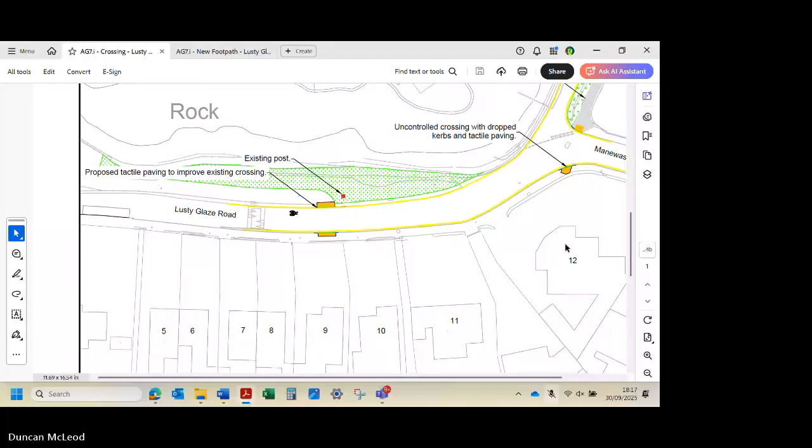Going along the cliff edge, people are following the path here and coming out here. It's only going to be, maybe if you're on a bike, or you've got pushchairs, wheelchair or wheeled, that you might then do this and cross over, and then cross back again here.

Yeah, it is within human nature. I mean, it doesn't need a psychologist, and I don't think any person has raised it. If I can just say something else before you go, there doesn't seem to be any signage indication that there's going to be crossing points anywhere.

Sorry, what do you mean? The warning for drivers that there's crossings, pedestrian crossings. I don't know, but it's not marked on here though, on a bend as well. I mean, I know it's a slow road, but it's a single line, bends, right? And it just seems like a really weird solution to something.

I just think the desired path point is really relevant here. Why spend money creating the better path on the right-hand side? Why don't they create a better path on the left-hand side? People are naturally wanting to be on that left-hand side to see the view. So bring the fence further forward and make the path to the right of that desired path.

Along the edge of the road, that's where people want to walk. Make the path on that side of the road. So you're saying extend this down to here. Yes, so you bring that border fence a little bit further forward, because of the erosion, but people are still walking on there and they will continue to do that. So why spend the money on the other side of the road?

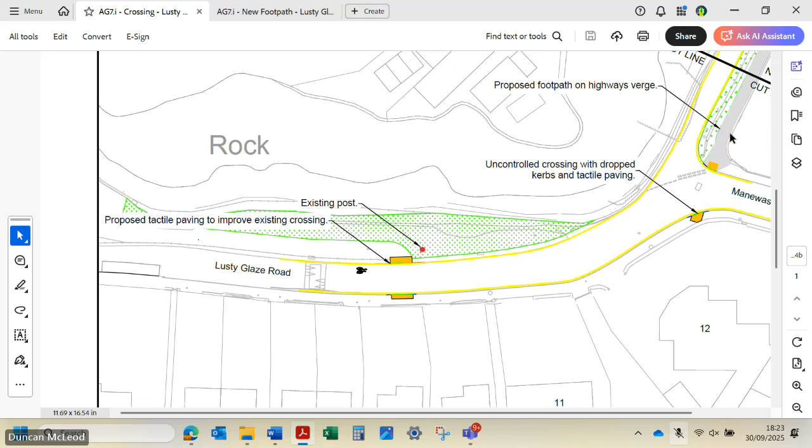That grey bit is actually a desire path, isn't it? Yeah, that they are able to take advantage of. That's a desire path, yeah. And that's going to be a fully fledged footpath.

On the other side, the hedging is such. Well, that's the fence there on the road. You haven't got room. What are we being asked to do, by the way? You're just consulting on it, so it's just commenting.

If we go to the letter, we have one of these forms we fill in for this type of thing, and it says whether you support or object. Can we tick both - support the top bit and object to... I think by the sounds of it, we do support it, subject to confirmation that they're going to...

So it's the list of buts, isn't it? Where's the signage, please, for road users? We've got some reassurance about signage for road users, permeable surface, and some reassurance that people aren't just going to be able to walk along the current desire path.

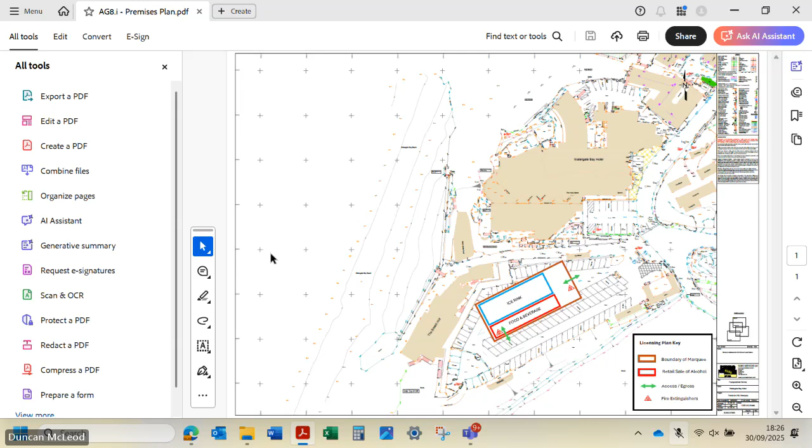It's rare to see time-limited licences. They used to be a thing a while ago, but you don't see them that often these days. It's almost like a temporary event - if it wasn't going on for as long as it is, it probably could have been covered by a TEN. But anyway, the premises is described as Christmas ice skating within a marquee that will be situated within the car park at Watergate Bay Hotel.

So in this car park here. The application for the premises licence is for a fixed duration between November this year and January next year - presumably the start of November and end of January, for a temporary Christmas ice rink.

It will be open to the public from 9 in the morning till 10 at night. The retail supply of alcohol, for consumption on the premises only, is 11 o'clock in the morning till 9:30 at night. What could possibly go wrong with that? But ice and alcohol, I mean... I'm glad somebody said it, because I think most of us were thinking it.

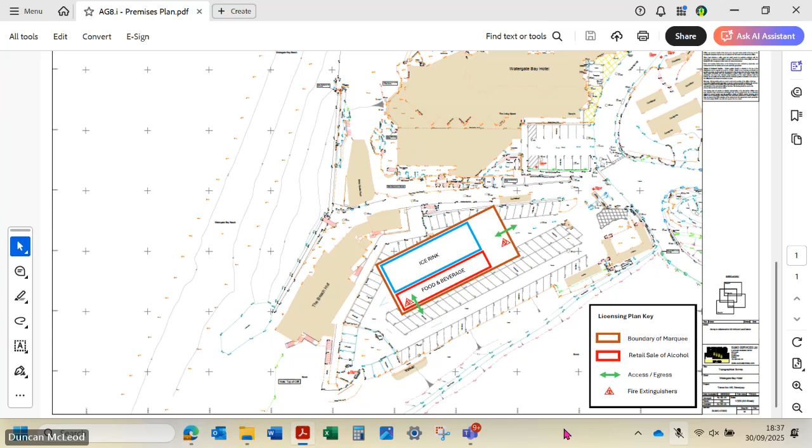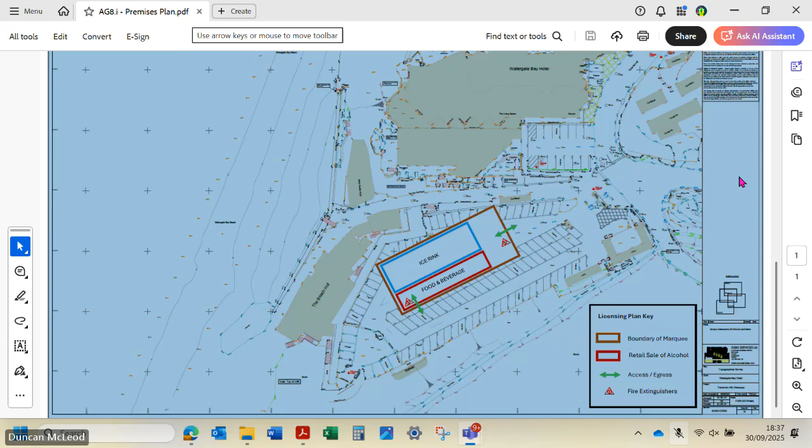Outside paving again, outside seating on the paving again. Looking at the photos though, it suggests they're already out there - we've got that street view as such. So this is the Clover Club, 19 Bank Street. The application is for furniture, as detailed in the application, on the highway to be used for the consumption. This is another one that follows licensing, having walked around the town. We've got some images.

So this is an existing layout that I suspect a licensing compliance officer has wandered past and said, have you got a pavement license? They said no, and were encouraged to apply for one. So that's their set out - I think it's been pretty much like that since day one.

They have provided us with this lovely layout. Basically you can see that they sit 2.5 metres out from the building line of the premises, if you like. No, it's 4 metres out, Duncan.

It isn't, because 4 metres is the measurement from this door to there. Oh, I see - okay, sorry, so it extends past the blockwork. It extends 2.5 metres. This bit is the bit that's undercover, and this is the bit that actually sticks out that they need the licence for.

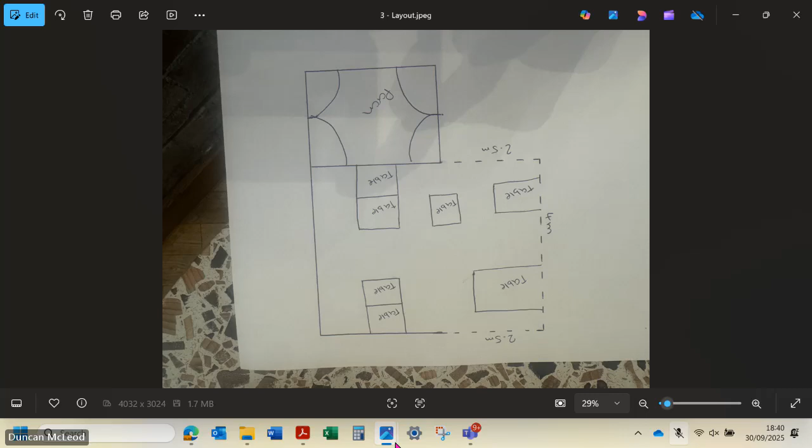So I'd suggest it's quite straightforward, unless anybody has heard any complaints about this particular layout. I mean, it's a pedestrianised area, but we do have large delivery vehicles - I wouldn't want it to come anywhere beyond that, because they still need to get lorries past there. I didn't know if something could be there for the visually impaired, because it's sticking out notably much further than previous applications we've seen.

I was just going to say that I think it's quite nice, and I'm happy to propose something.

I don't know whether people want more discussion before we get to a proposal. I think it's been in place for a couple of years. I'm not aware of the town council having received any complaints about it. Highways have certainly had plenty of time to look at it and haven't raised any issues. I go into Superdrug reasonably often and haven't stumbled over it.

Oh, I missed it. So we've got some licensing updates. There is finally the third attempt at a grant hearing for Sahara City, which Sarah and I are going to attend tomorrow morning. Hopefully it's not going to take forever - it really shouldn't do.

The Cornwall Council street trading policy that we were consulted on changes to has now been through the relevant Cornwall Council committee, and they've agreed it. The new street trading policy is now on Cornwall Council's website, along with the various changes I drew to your attention, including DBS checks, policy clarifications, a stronger move away from single-use plastics, and adoption of various public health low carbon initiatives.

There were a couple of unexpected changes too. One is a street trading register, which will be really helpful for me because I try to keep track of these things. If somebody suddenly stops trading, nobody tells me, so I have to check with the officer every now and again to understand who is street trading where in Newquay. Now they're actually going to have a register, which is really good.

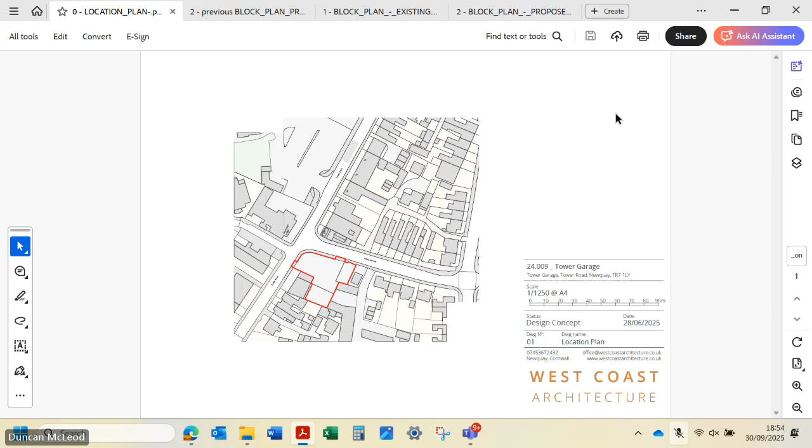Just as a quick recap, the refusal was that the previous design was considered to result in an unacceptable level of overbearing, overshadowing and overlooking to number 66 Tower Road.

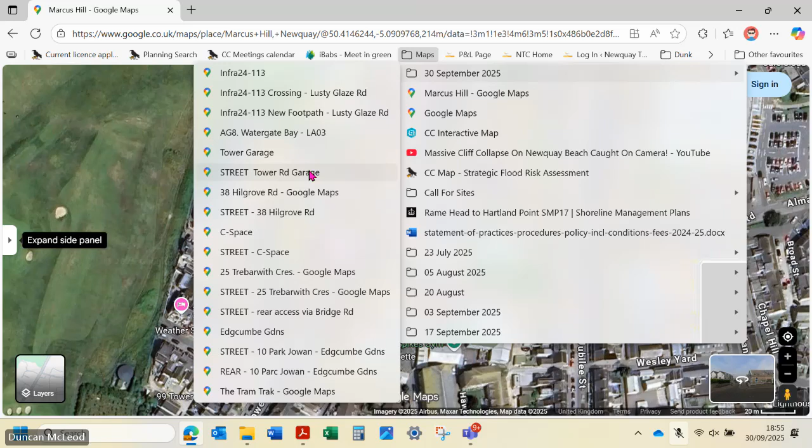If I go onto the street view, so number 66 Tower Road is this property here, okay? It's the first floor, effectively - we've got businesses on the ground floor, and it's this first floor. So it was thought that height, massing, proximity, window placement, etc., were all going to harm the residential amenity of number 66. That was the only material planning consideration it was refused on.

The other one was a lack of a planning obligation in terms of a completed Section 106 agreement, because they crossed that threshold of 10 dwelling units, and they do again with this, but I believe that is now resolved, and that's a matter for Cornwall Council anyway.

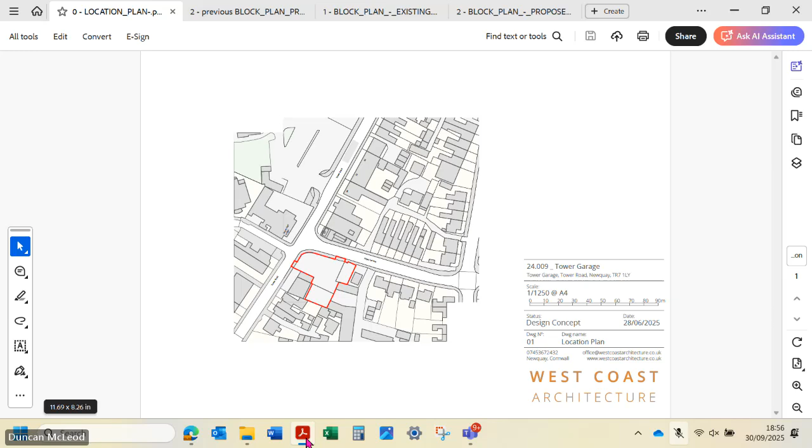Just to familiarise ourselves with the application site - so you see number 66 just sitting there, but the red line application site, the existing block plan, it's characterised by a large open space, and then these two commercial garage workshop buildings. It's worth noting that I believe the garage is currently still in operation.

Yeah, it is still working. It's not a vacant site. I thought Tower Garage is actually closed, so it's somebody else using it. The application documents say that it's still operating, and when I went past it the other day, it looked active - there were cars there.

Well, historically, of course, it's the old Hope fish cellars, as I discovered in my travels. Nothing left of it, apart from the name.

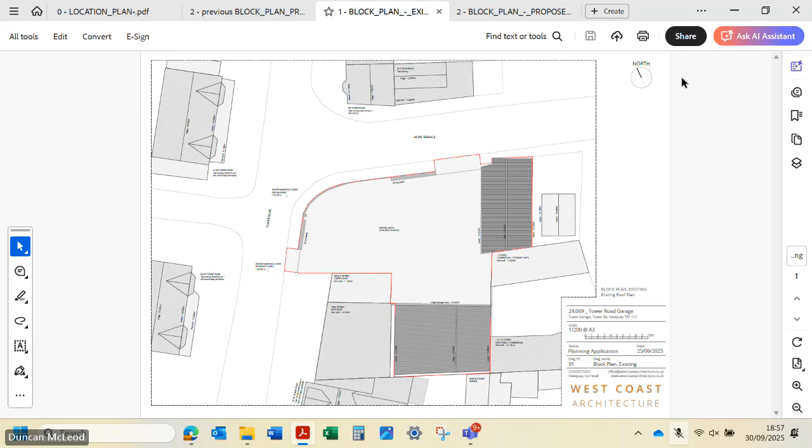So we've got a previous block plan. There are two proposed buildings to this - you've got this main building, although there are two elements to this main building at the top here, and then you've got the coach house down the bottom here. The coach house was definitely seen as impinging upon number 66. Interestingly, though, a lot of the changes have actually happened on the main building. So that was the block plan that we looked at last time.

Now, what you've got here - it isn't that they've suddenly put in a play park and a green field, it's a green roof. So this was effectively a 3-storey development. The new plan that has come back keeps this grey element of the main building as 3 storeys, and this green one has been reduced by 2, so it's now a single-storey building with a green roof. The coach house, there are some little changes to it, but we'll have a look at those in a moment.

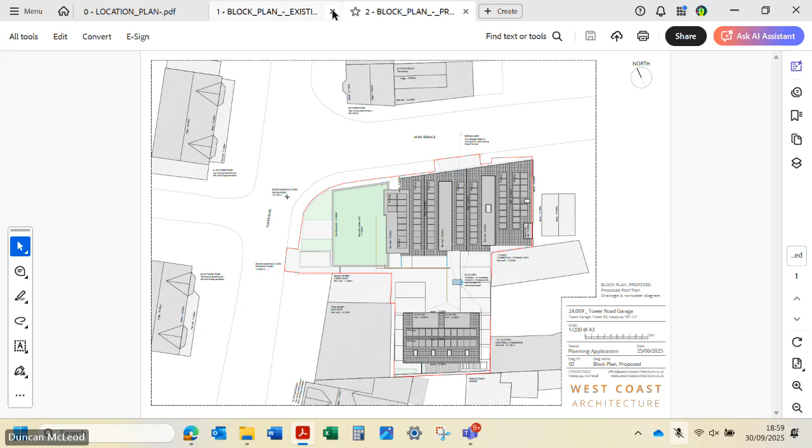So I wanted to have a look at the floor plans - normally the insides of these things aren't that important, but in this case they are. I'm going to get rid of these because unfortunately I'm going to end up opening so many PDFs, it's going to be - I'm just not going to be able to find my way around. So...

This was the previous main building that runs along Hope Terrace, spread over 3 stories. It did have 3 commercial units. So this was, when we looked at it last time, a mixed-use development with 3 commercial units at ground floor level, and the vehicular access is from Hope Terrace, between the building in the middle and the one on the right.

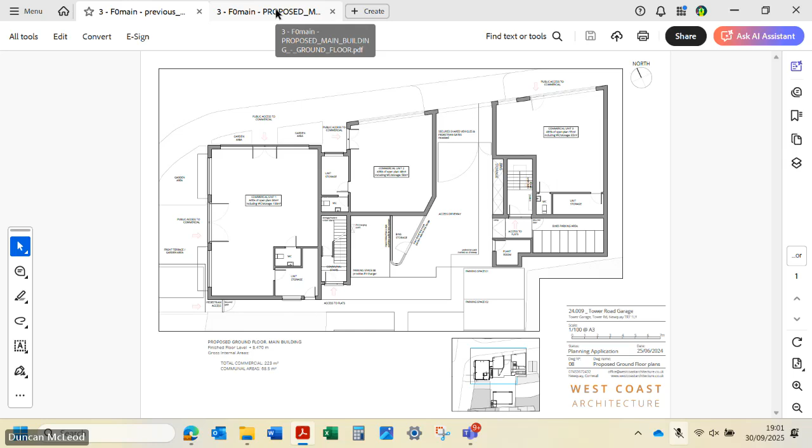So this is a significant change: the site is no longer proposed as mixed-use development. It is all residential. They have got 4 one-bedroom apartments in that space where the retail units would have been. 3 of these are designated as holiday use only.

One important and positive change is that a lift has been added. On the ground floor, there are 4 flats, 3 of which are holiday use only.

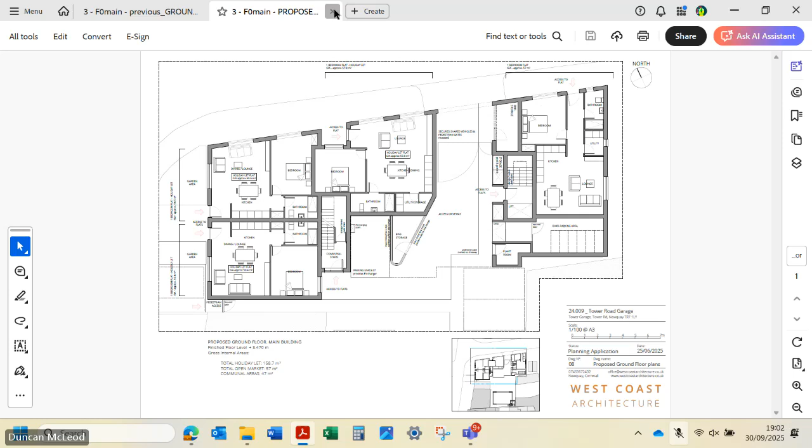So the right-hand one is still 3 stories, is it? They will all be - if you wait a moment, you'll get a better idea when I open these ones. When we look at the first floor, it becomes more apparent. Actually, no, we don't need that one. So this was the previous first floor plan.

They refer to it in the documentation as the Hope Terrace building and the Tower Road building. This is the Tower Road building because it faces Tower Road, and this one is the Hope Terrace building. They are all one construction, but referred to in 2 parts. Originally, the Tower Road building would have had first floor and second floor accommodation. In the new proposal it becomes a flat green roof because that part of the building has become a single story.

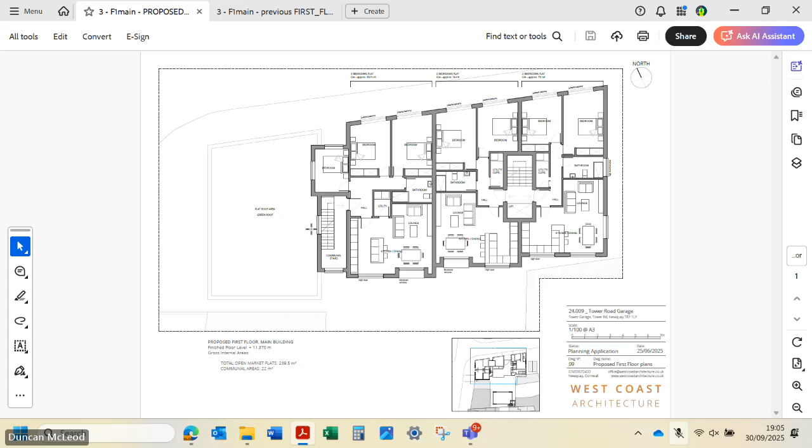We are told that reducing the Tower Road building to a single story is intended in part to address concerns of overbearing, overshadowing and overlooking of number 66. But it's interesting to note that in the officer's refusal, a lot of his concern seemed to be to do with the coach house - though I don't think it was solely that, but the coach house is obviously the closer part of the development. We'll look at the coach house now.

I'll finish this off with the street elevations, but I do apologise that this is such a fiddly thing to look at.

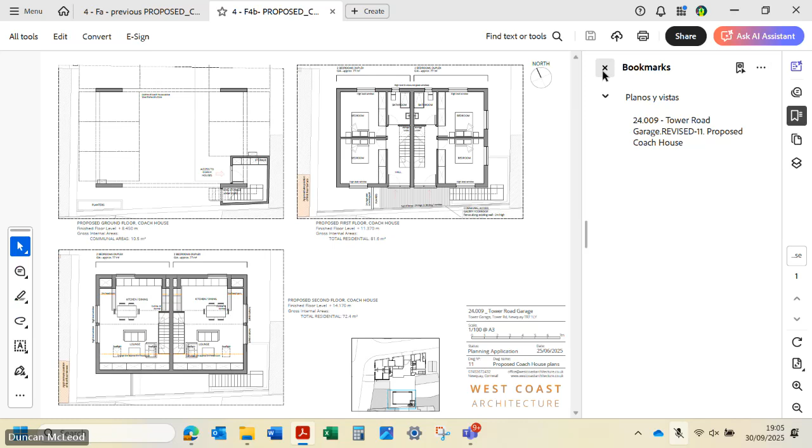So the coach house runs along the south of the site, as we saw. It's a similar footprint to the workshop that's there at the moment, and this building is also spread over 3 stories. There is a ground floor - that's the top left image. There's a lobby entrance to the residential units, which was in the bottom left-hand corner. It has now been moved to the bottom right-hand corner, away from the street and away from number 66.

It now occupies space that was given over to a secure surfboard store and shower. That has now gone, and the lobby into the coach house now sits in that space. There were 5 parking spaces in the previous design, and there are still 5 parking spaces here.

Floors 1 and 2 are occupied by a pair of 2-bedroom duplex apartments - 2 apartments, both spread over 2 floors. In total, there are 12 self-contained units on this development: 9 are open market residential flats, 3 are holiday lets. It's not a mixed-use site anymore, it's purely residential. The site provides, by my reckoning, 13 on-site parking spaces.

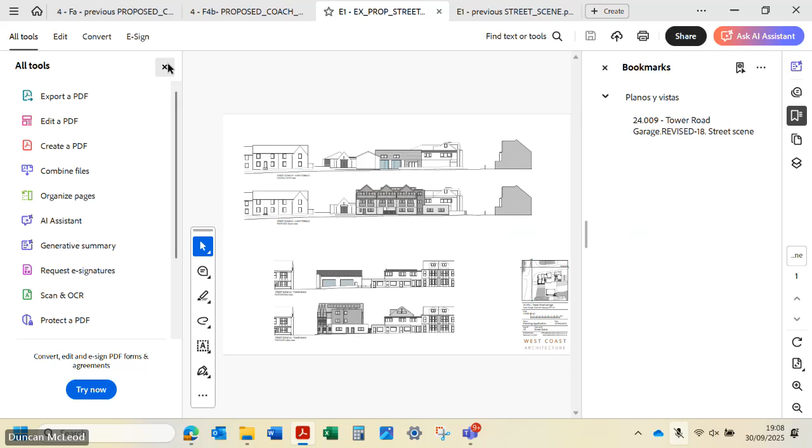That's the access to the coach house. So I imagine it's like that on the other one. Yeah.

Did you want to see that in more detail? No, I'll let you continue, Duncan. Okay, looking at the elevations. Right, so the previous street scene, let's see if we can...

Yeah, so this is the side-facing Hope Terrace. At the top you've got what's there at the moment, and the bottom drawing was the original proposal - retail units, commercial units on the bottom, and then 2 stories of residential above.

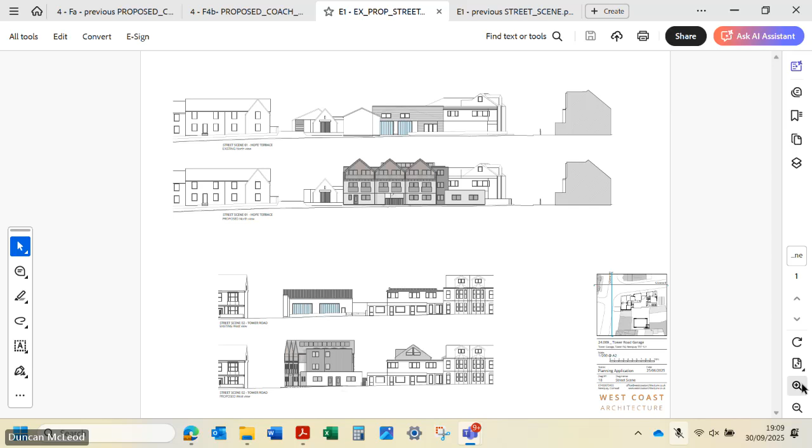Again, that was what was there before, and this is the reduced scheme. So the key differences being you've not got commercial units on the bottom, and the Tower Road building, as we're calling it, is now 1 story instead of 3. I'll flick between the two.

Okay, right, sorry, could I just also question or add - so the top bit, what's currently there, is actually quite set back from the road, isn't it? It's not on the pavement, whereas I'm assuming...

Yeah, so what we're talking about is where those cars are, right smack bang on the pavement. The beauty of elevations is they flatten everything out and you don't get that understanding. You're quite right to point that out - it's a bit misleading, I would say, those images that you just shared.

But you can see the windows. You're right to point that out - weren't clear, were they? If you go back to the one before, the display before.

So it's the street scene. Those are the windows of number 66 behind, aren't they? Yeah, yes, that's right. So that's why they are there - that was the previous one where they had the building in front of those windows.

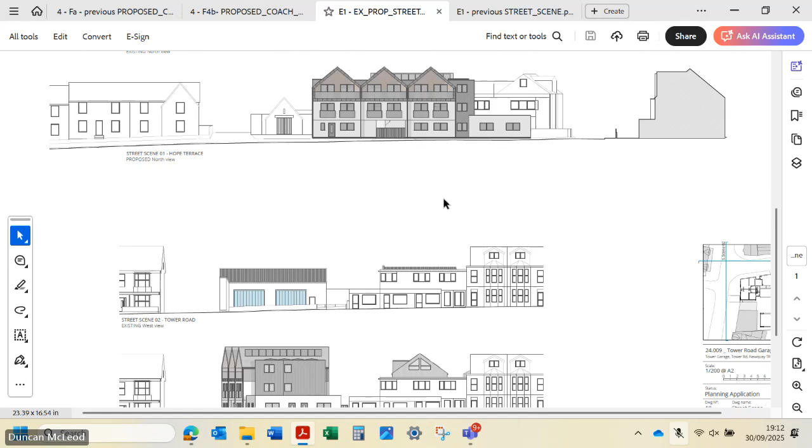It would have been quite nice if they, like other properties along the road, just have a little bit off the pavement, but I get that, and then they drive through in the middle of the building, so to speak, through an arch effectively, to the parking behind.

But it's that behind his flat as to what's going on there with the coach house - I think that is where our concerns are. I mean, because the design of them is in keeping with other housing on the street, with the apex frontage, you know, the gable ends.

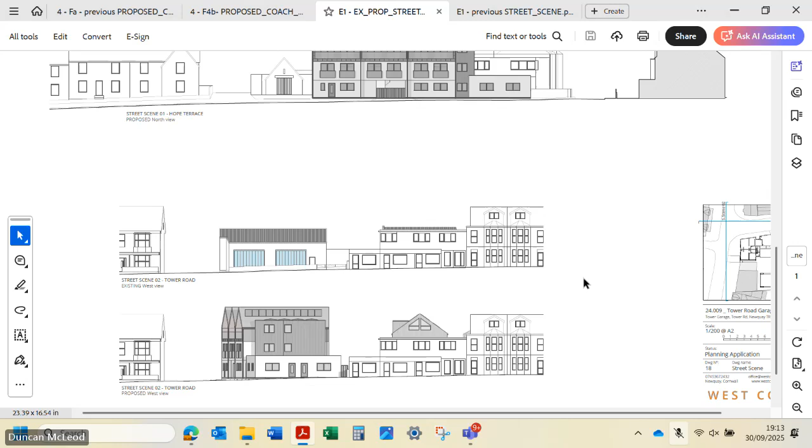Does anybody have any issues with that? It is going to be slightly taller than the housing opposite, but not by much. It's just that people are effectively living in the roof space with that third story.

Could I open the planning statement? What did the officer say before about the coach house? Because there's not a lot of change on that. It kind of depends how you interpret it.

The design, I think they must be talking about the overall design, not the coach house, not the main building, but the overall design results in an unacceptable level of overbearing, overshadowing and overlooking of number 66, primarily due to height, massing, proximity, window placement. And then it says the inset balcony and access walkway of the coach house. That element, I believe, has now been addressed.

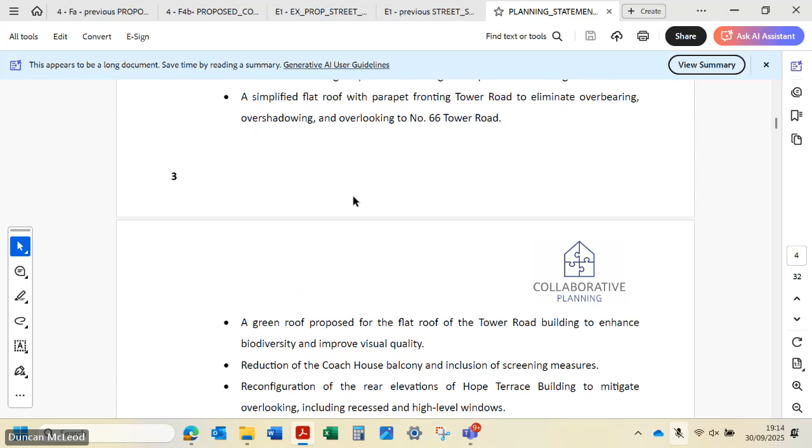So the applicants say the entrance and the walkway has been moved to the other side, but it doesn't seem to have addressed everything - they've probably changed the windows too. If we look at where the window is, no it doesn't actually. No, the windows are still there. So they've only addressed part of it, haven't they? But not the distance it's away, and it's still going to be overbearing, isn't it?

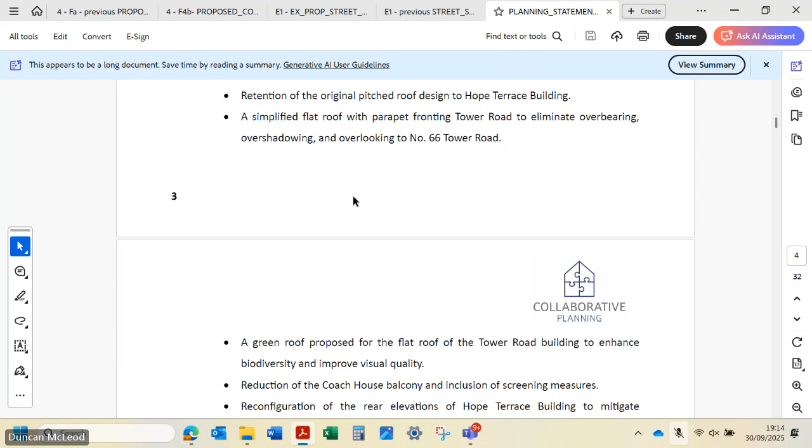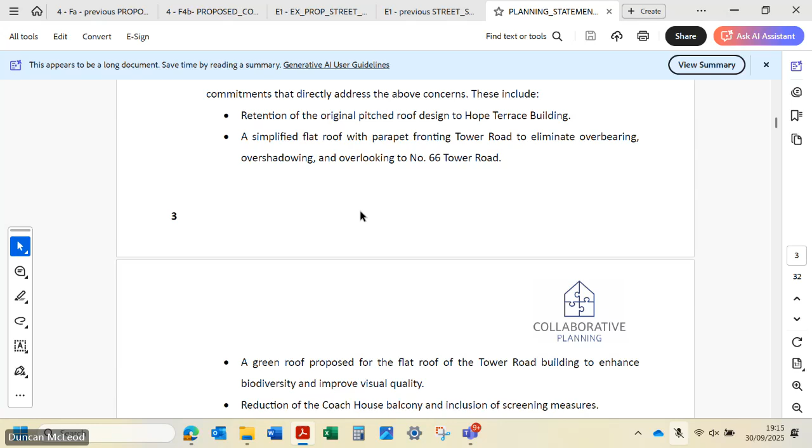So what we've got here in the planning statement is it says the revised scheme includes a number of design amendments and planning commitments. These include retention of the original pitched roof design to the Hope building. Was that okay? That doesn't sound like a change, that sounds like something staying the same. A simplified flat roof with parapet.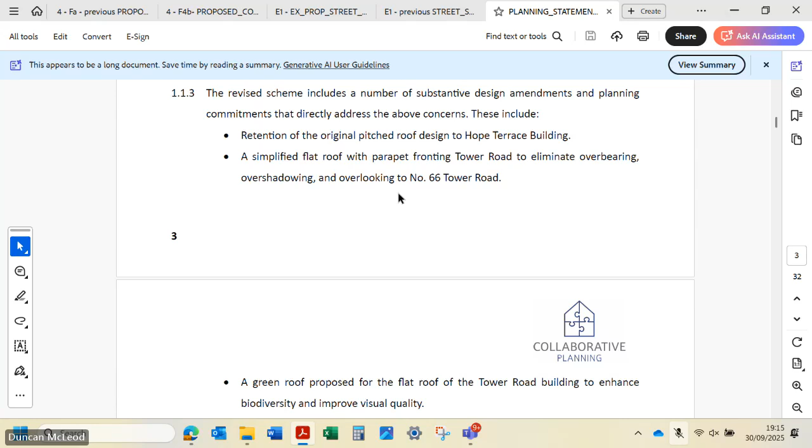So we've seen that - that's the first story element of the Tower Road building. A green roof to enhance biodiversity and improve visual quality. Reduction of the coach house balcony and inclusion of screening measures. So that suggests to me that the balcony has been redesigned so that it's not causing an overlooking issue.

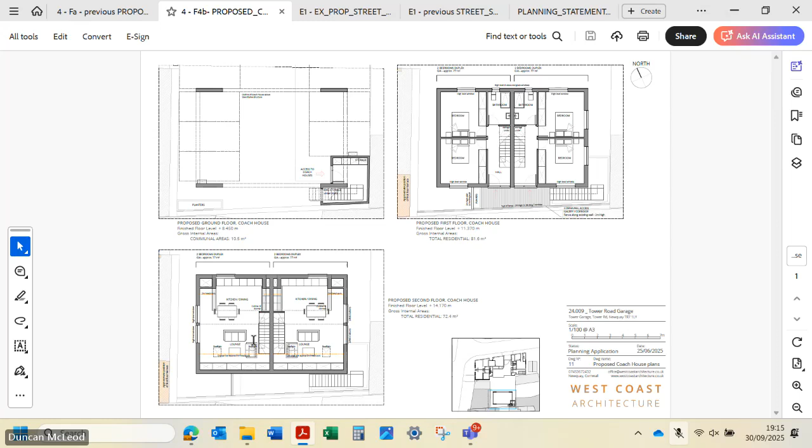But perhaps we need to have a close look at the elevations and the floor plan, perhaps, to start with. I'm just trying to figure out where this is.

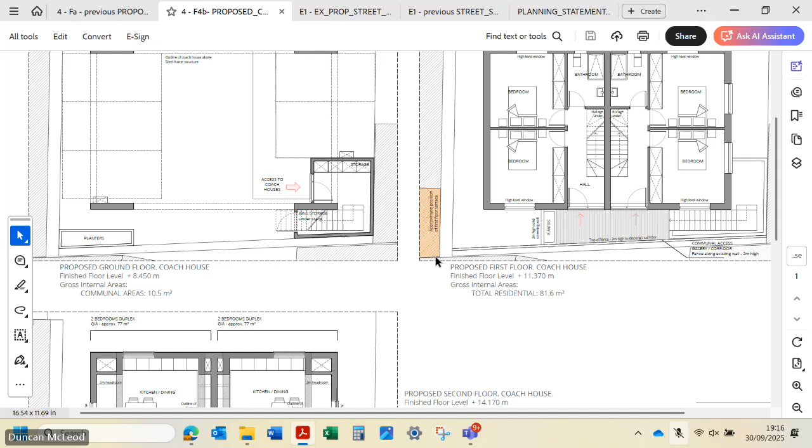But effectively, we don't know what his window is at the back, do we? Because effectively he's going to have a brick wall, which looks like a couple of meters in his face, in the photograph he sent. He's only done one - I don't understand what most of the photographs are supposed to indicate, but he does have two photographs where he shows the building coming in front of part of his window.

Hang on, let's have a look at those photos. I've got some photographs from the last time I looked at this - there weren't any photographs on there. So are there photographs on the current application? It's the first thing on the list for the planning applications, Duncan. I think they've been uploaded since I looked at this. Okay, are they any of these?

So you can see from this one how the reduction to one story is going to improve - but he says from his point of view the coach house is coming in front of that window. And his latest photograph - well, it's... no, it isn't, is it? It's not that window.

No, well it's the house with the orange flag. The window he's showing has got something in front of his window. No, that's the corner, is it this one? This is going to be the single story in front of that, so this view is not going to be impeded upon anymore. According to him, it is. Yeah, and he's wrong - well, is he?

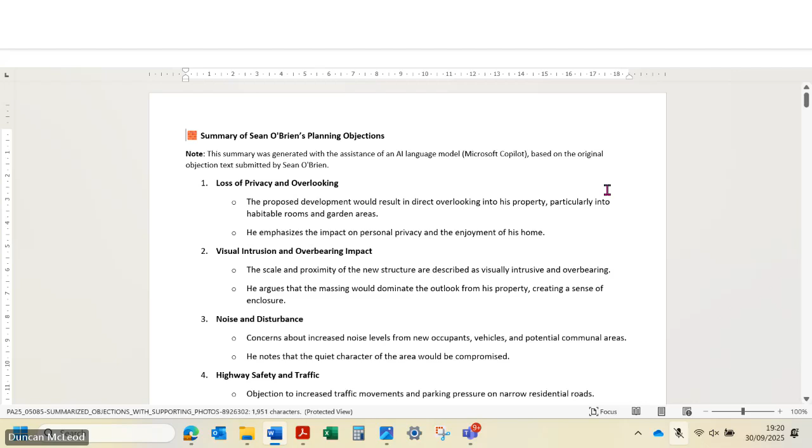So if you scan down on that document, keep going, at that white one, keep going. Is that his balcony? That one. So that is the back of his, right, so this is the corrugated iron roof which will be demolished.

And then effectively, from a very short distance away, he's going to be having the coach house side, which is going to be his outlook from that, and shading is going to be badly impacting on the back of his apartment and his terrace and the little double doors.

So if you scroll down then to the next one - I don't know what the next one is. Oh, that's the existing building, is it? So that's the side, the roof of the existing building.

So this bit here is cut away with this terrace, so that's cut away from the terrace. So you can see that it's got a supporting strut that's going onto the cover.

So this will go. We shouldn't involve ourselves too much with that, because that's building control. Yeah, so this will go. So you can imagine about this distance here, it's going to be the side of the coach house, which is going to impact on his outlook and the light.

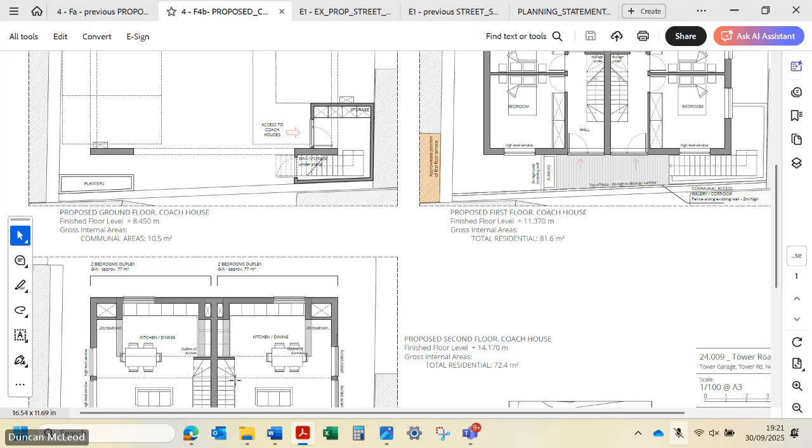Would it be useful to have a look again at the coach house, the proposed plan? So I believe that this grey hatched piece of wall here is what we've just been looking at - that's the covered bit, and this is the open bit of terrace here. Yeah, so there is separation between the two.

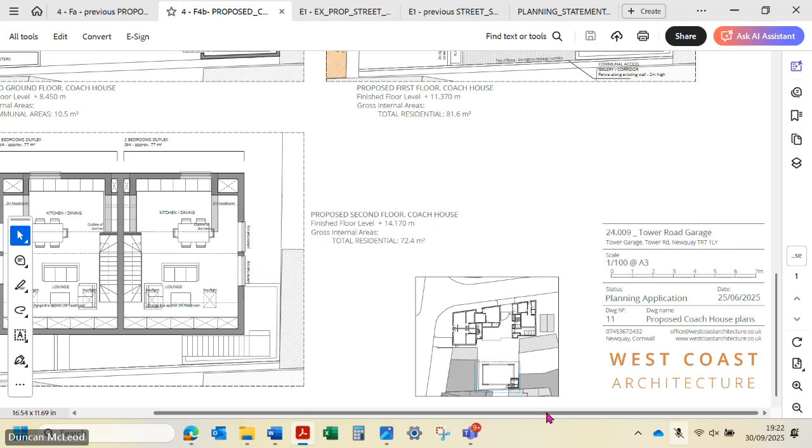Where there isn't currently. So do you know the distance for that? Have you got a scale on there somewhere? So are they saying that's about 1 to 2 metres? The balcony will look along the back of the building. It's about 2 metres from there to there, that is going to be his outlook from that.

And that will be shadowing over, especially in the summer when the sun rises more in the northeast. This is going to be in direct line of it. So it will be causing overshadowing and affecting his outlook.

This is a decking terrace for these, but they're putting up a 2 metre screen there. So that's still an improvement,

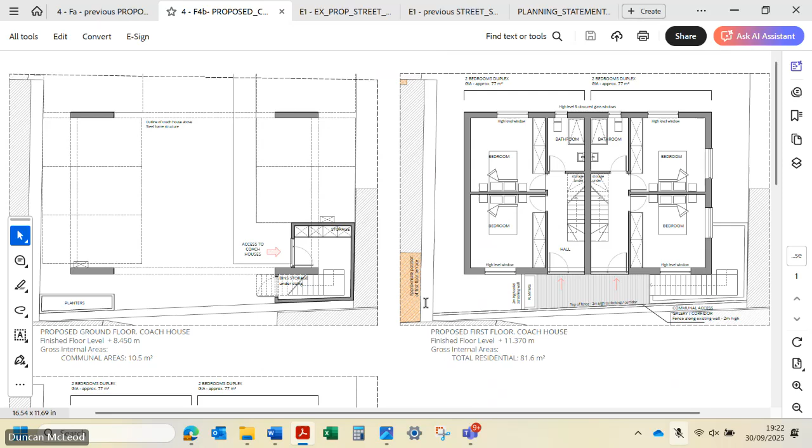but it still doesn't get away from the fact that the whole building is very close to his utility space - in terms of amenity space, in terms of utility space. The outdoor toilet windows, the only windows are the high level ones, so there's no overlooking from the coach house. It's really oppressive space, so we would turn that into a material consideration.

We would talk about the outlook that they have. You've got no right to a view, but you have got a right to an outlook. And outlook at the moment,

from what we can, from what we've sort of gathered - where's that? It's partially blocking it. So when you go down to the next set of photographs, you've still got the photographs.

Yes, here they are, on the Word scroll document. If you scroll down a bit... there's more. So that's the view at the back.

So this one is going to be a single story. If you think of that line there, he's not going to have his light and his outlook blocked through that set of windows. Scroll down to the one underneath.

Keep going. He's put something in there. What's that? So that's the same photograph from the other side. So he's got 2 rooms looking out that way.

You mean this grey bit? Right, he looks like the end of the building will be. That's what he's saying, he's saying it's blocking his view.

I don't even think the front is right. This one is going to be lower with a green roof, and the next one is going to be the main building. This is what he thinks the 3-story element of what we're calling the Hope Terrace.

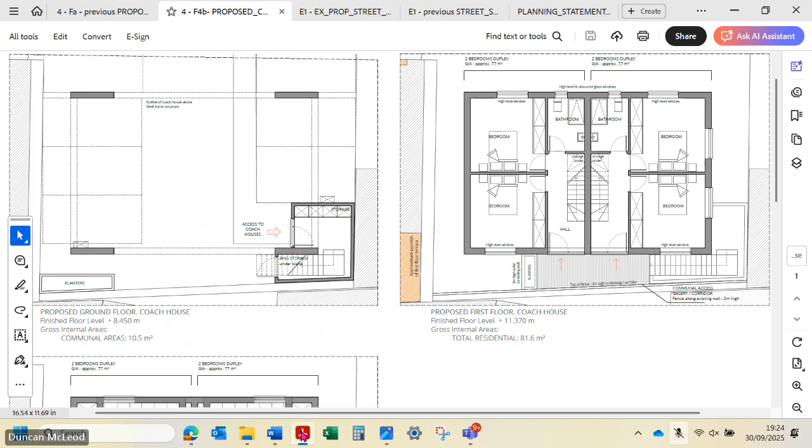But that does make it look like it's right outside his window. And it's not - in actual fact, it's back, much further away.

If we go back to the block plan - I knew this was going to be an absolute beast, I really did. So he's here, he's here, not here. You've got that distance there - it's a bit incorrect there, and he's very incorrect there.

Because when you look at it from the floor plan the other way, it's clear the windows are clear. He's making out that middle section of that new build is further away - because that window is further away as well - which is nowhere near it.

So no, he's wrong on that. But looking at this, he's perfectly right about the coach house. I think the single story element probably doesn't have quite as good a view of the road. At the moment you've got a view of the garage.

So I don't think we can put too much weight on this, because I don't think that this is quite right. No, that isn't right. So sorry, Karen.

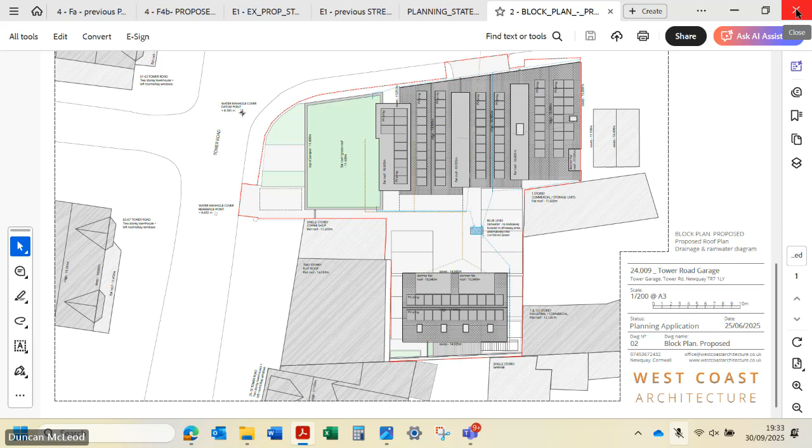Okay, so Duncan, can we also note that they need to preferably have a grey water recycling system? They haven't put in their drainage plans, so it'd be nice if they had permeable surfaces as well. And can we have some bee, bat, bird habitation provision, not just a green roof, which will be seagull nesting.

The main thrust of this is the impact of the coach house on number 66. So there will still be noticeable effects on the eastern side of number 66, or the west side of the coach house is still too close. And the effect on the light. Light and outlook, yes absolutely.

In terms of the street scene, because that's something you raised before, are you happy with the street scene now? I mean, we're seeing it all over Newquay really, haven't we, that design of property. See them on Mount Wise. It's quite common now, so there is a bit of a hodgepodge of buildings around. That's not a particularly pretty area, is it? No, well, 'cause it's been a garage. Mentioning E1 is a good one.

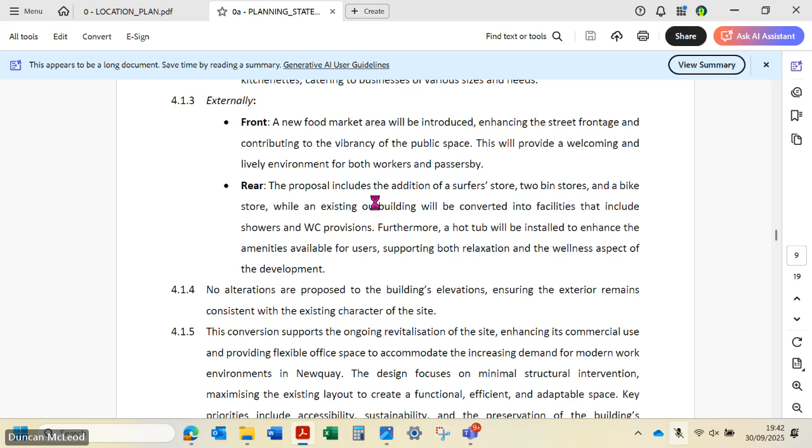It's going to be a spa and things, but they did have it as pizza. Yeah, they did. No, they did, and they had it as a bar and stuff downstairs. What direction is it that looks over?

So it's the west end of the Killacourt, looking east. But it has that alleyway that goes up past Sprout, and basically has entrance into the courtyard area at the back, which would have been the delivery entrance for when it was a house, I imagine, originally.

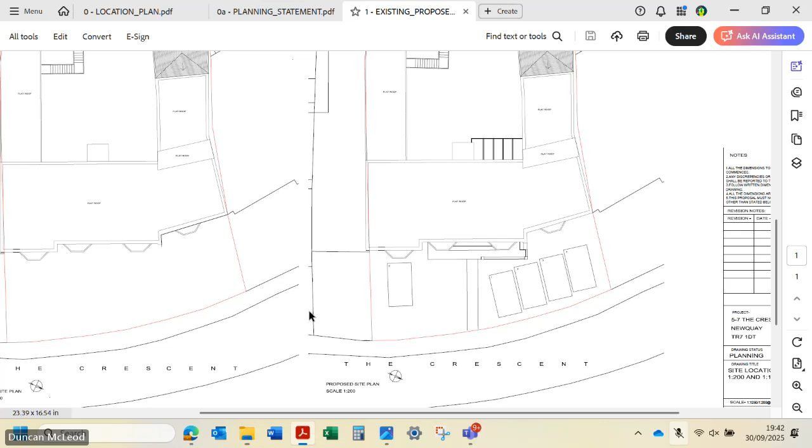I think the ground floor plans are a good place to start with this, because the courtyard area at the back is huge. So hopefully you can see, you've got a building frontage, and then it's got these two wings - that's the open courtyard.

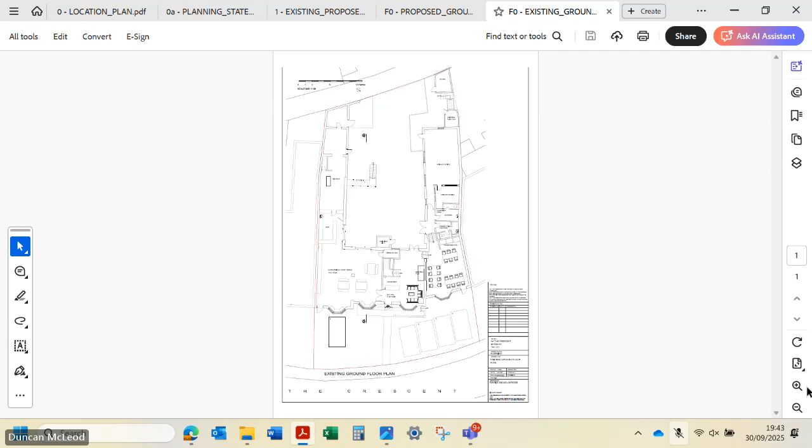Where are they going to have the food market? So the market's going to be at the front here - I'll zoom in on that a little bit. Then that just leaves four car parking spaces. Originally, at the moment, it's demarcated as five car parking spaces.

What they've got is their food offerings that they're talking about - they're saying food vans. It's not the same thing, is it, really? Not quite, no. Well, I don't know, it's sort of...

What are they using the space at the back for? Well, it used to have a Pizza Hut in this section here, and it was just outside benches, and I think there was a covered over area. Didn't it have like a marquee-like structure over it that they used to do out here that you could eat and things?

They have a sauna as well, like some sort of sauna - a cold plunge and a sauna thing. They had like a gypsy caravan kind of thing in there, didn't they? So what are they planning to do now with it?

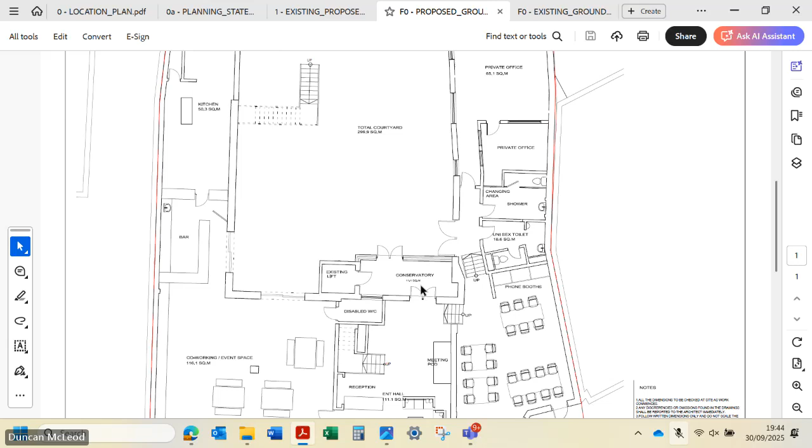So at the rear, we have a bin store, a bike store, a surf store, and a conservatory. These are all sort of outbuildings at the back, and a little conservatory bit that's being built on the rear of that front-facing building. So they're not doing a massive amount with it - no, it's still a big empty space, isn't it?

Is there any entrance to it? Yeah, at the back - that's the lane at the back. So Sprout is up here, that's the back lane, and then they've got this gated access from the lane - Crescent Lane, I believe it's called.

In terms of the first floor and the second floor, they don't really show much. The first floor certainly doesn't show a great number of changes because that's already been turned into office space. Second floor, hotel rooms are being repurposed as workspaces - we could look at them if you like, but it's just been empty and not used, it doesn't really add much to your understanding of it.

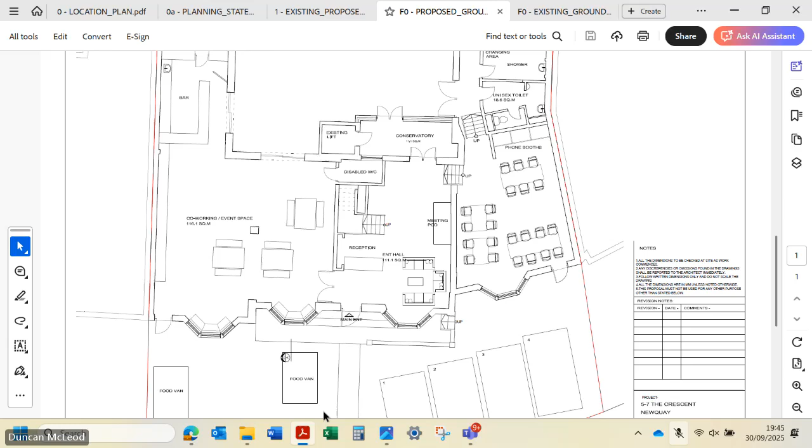I haven't got any huge problems with changes to the exterior at the front and very little at the rear. Probably one of the main changes is losing a parking space and having food vans here.

I wish I knew more about those 2 food vans, but still. There are actually free parking spaces along the Crescent, so, I mean, they're always full, but technically there are parking spaces there.

You're on the other side of the road where cars are parked, I think, along the alleys on that side. So effectively, it's a bit cluttered in front there. What it's saying is it's going to have 4 spaces there - 1, 2, 3, 4. So this car, that one, and the bike are all parked erroneously, and then we're going to have maybe 2 food vans here.

Which, I've got to admit, I know it's not a busy road. It's right opposite the Killacourt, with people crossing over, children going, oh let's go over that, and running straight over the road. Can you just scan the road - what's behind the car? Oh, we've got the fence there, so they can't do that. They shouldn't be doing that anyway. It's not busy.

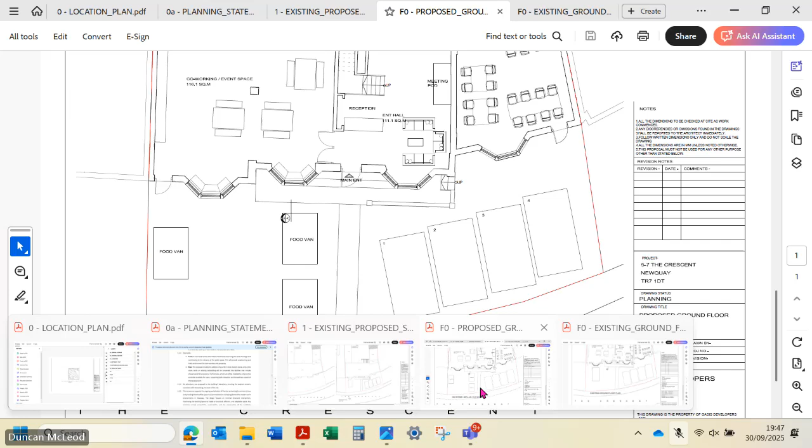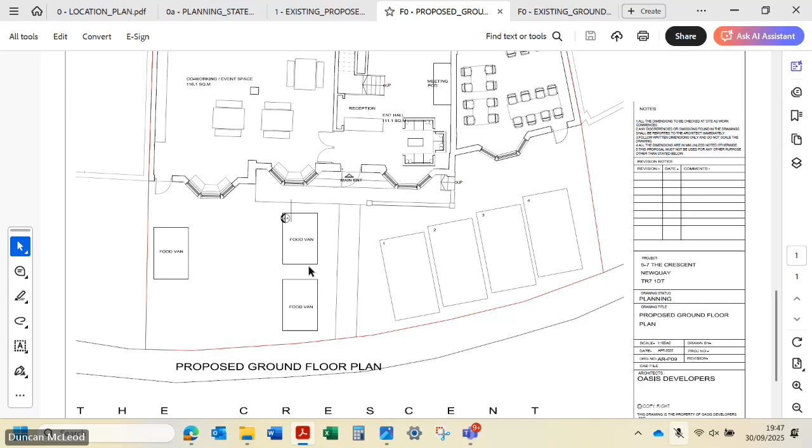So that's the fire exit, and the food vans - because they're all within 5 metres of the publicly maintained highway, they're all going to need licensing, food vans or anybody, to be honest. That would be considered street trading, and those would have to follow as separate applications, because there's potentially noise and odour. These people might not be happy waking up to the smell of fried onions, and noise and stuff. So if it were approved and they went ahead with that, there would be further applications to cover the food traders.

So I'm happy to have no objection to this, pending the positioning of those food vans and that licences for them are applied for. Well, the food licences are neither here - you couldn't condition that in the planning condition. Well, I've put no objection, so the expectation is then that they...

God, grief. Yeah, they're doing stuff with the roof. It's not one of the most beautiful. No, it's not. No, it's not. Sorry, nothing that.

And then you've got these still under construction, sort of phase 2 of the Cliff Edge Apartments, which is quite close. So you've got the Carnbray Apartments just to the south of it, and the Parc Jowan ones to the south of it. So this seeks permission for the addition - it's currently 2-storey, and it wants a 3rd floor adding onto the top of it, which will allow for creation of a master bedroom with ensuite facilities and a private balcony.

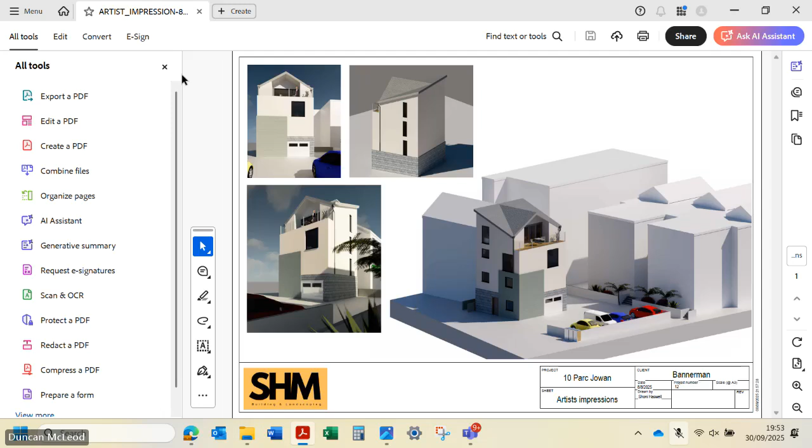So we have a really useful artist's impression. That helps us quite a lot in understanding what we're talking about. I do like these things, they're much better than just flat elevations.

It helps us understand the orientation, especially with regard to the balcony, and the unusual combination of this mono-pitch roof with a pitched roof dormer cut into it as well. I don't think we've seen that very often, if at all. It's quite nice, isn't it? We'll have a quick look at the elevations.

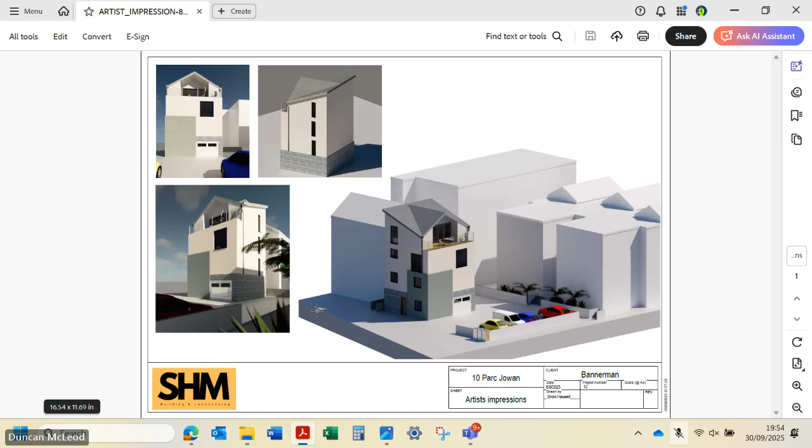I would have preferred slightly better labelling on this, because you can see, this isn't north facing, this is sort of northwest, that's north-east. But they didn't label it up like that anyway.

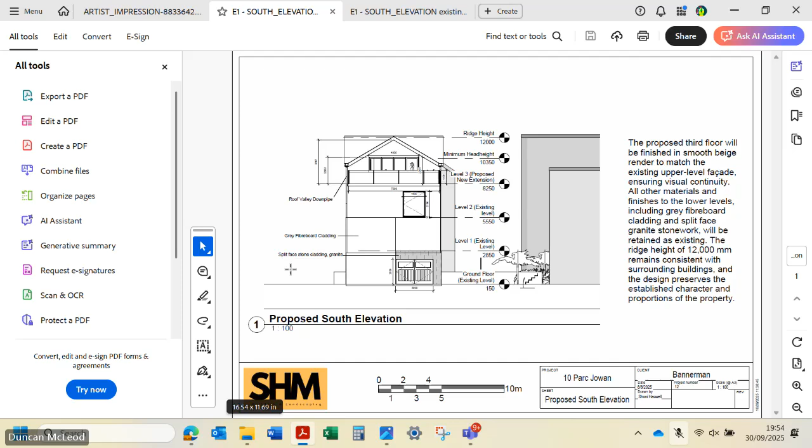The first one that we were going to have a look at was the south elevations, so that's your existing. When it says south, it means southwest facing. Just going back to this, that's kind of facing this way across the car park.

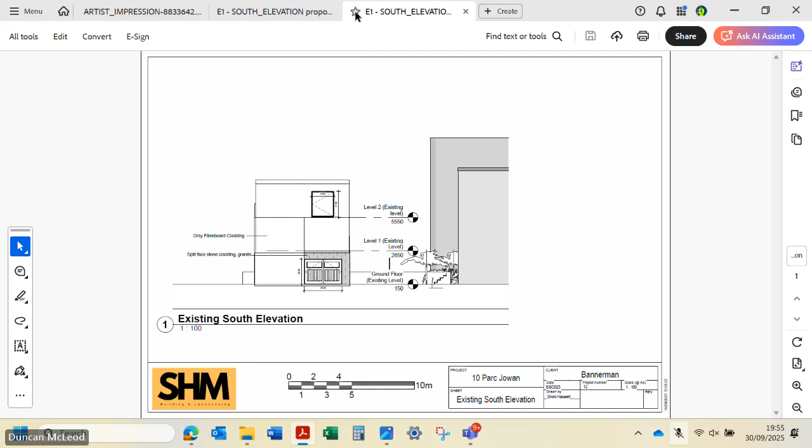Is it any higher than the existing buildings surrounding it? No. I don't think you can see it from the street. The only issue I saw was if windows were at the back of that development there, but it's - that was the only thing. They probably, that development has the staircases at the back, I imagine, and it's not going to have a problem because having an exterior balcony, if that is your bedroom window at the back, that's quite close.

No. I mean, he's just given himself some outdoor amenities, hasn't he? I would say that you can have this balcony here, it is actually quite a distance away there, isn't it - 10 metres. So you're going to be 10 metres away from looking into people's windows there.

So as I said, I suspect the staircases are at the back. This is why it's showing you the elevation - it's got a 1.1 metre glass balustrade around it. There's no side screening or anything like that.

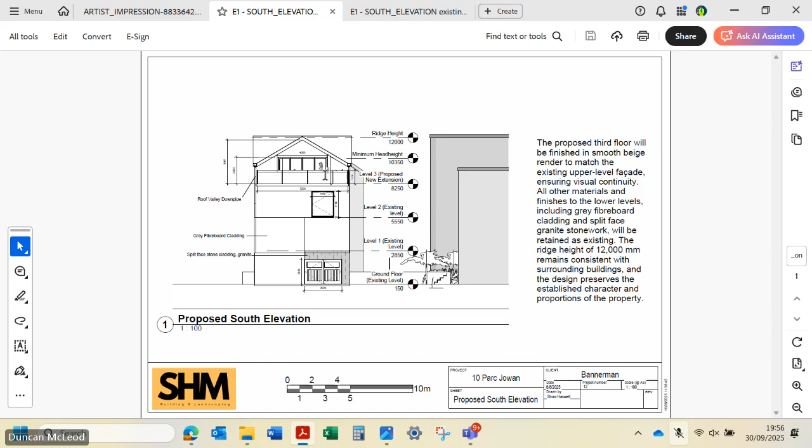So I'm quite happy with this to propose - no objection, subject to no overlooking. Seconder? Yeah, all in favour? All in favour. Whoop, whoop. Brilliant. You okay there, Duncan? Yep, fantastic.

Application 4, I'm doing - so PA 25/07055, 25 Trebarwith Crescent, Newquay. Change of use of existing residential annex to holiday letting accommodation with no operational development proposed, and it's retrospective, so they're already doing this. So when Duncan gets these out, what you're going to think is oh my gosh, they had that as an annex. It is small - its area is 22.82 metres square.

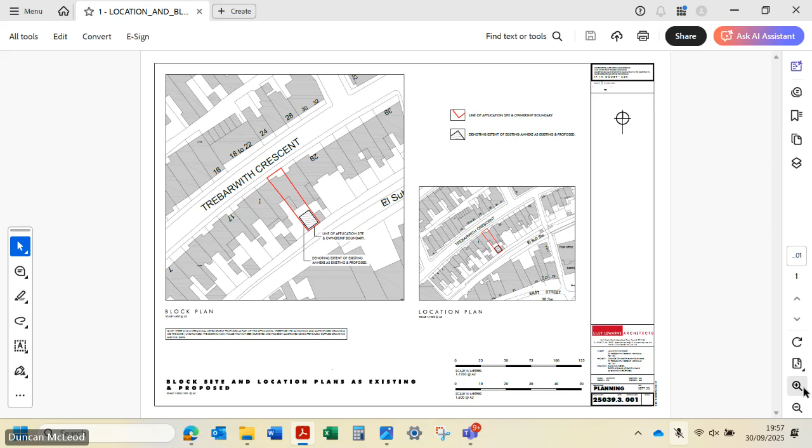I know, Joanna. Yes, I think Duncan will always say this, but effectively I went back to look at the previous planning permission, 2021, when they got an annex. You know how cynical I am about annexes, and it was all to do with his poor old mother who was going to be living in the annex. But it's been sold on to somebody else, and then they've turned it into holiday accommodation.

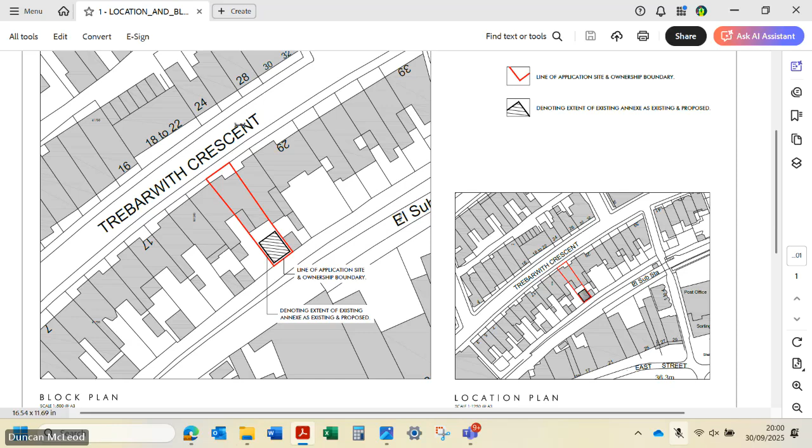So if we look at both the existing and proposed plan, because it's already there. And there we go, so there it is. That's the house, and this is it, effectively what was their back garden. So that's the gate onto that track, and it goes straight in to its door.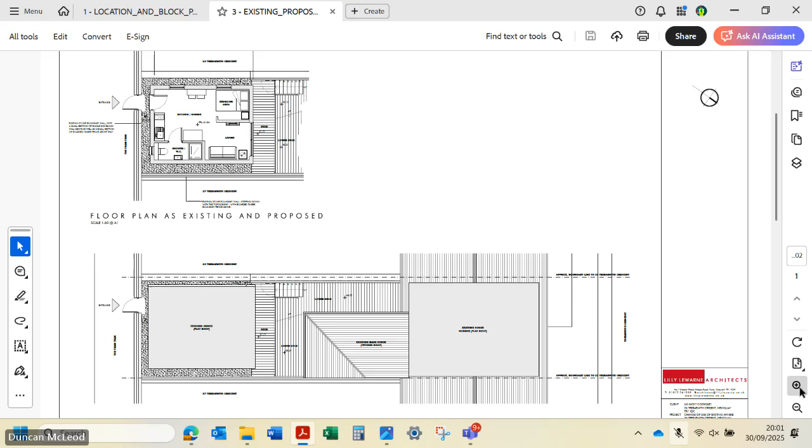This is the kitchen unit. This is the toilet, shower, sitting area, a double bed, and a little dining table with 2 chairs looking out the window. So it's got a wall just outside the window - that's its outlook for those 2 windows. There we go, and it's got a window there looking over to a wall there. It's got no outlook on this side. And then it's got these double doors onto the patio, for when it was an annex.

And I suppose getting access to Granny more readily than walking all the way round. So its area, as given in the application, is 22.82 metres squared. So for a single person, for a single granny annex, that would have been adequate. As a holiday let, we're not talking quality holiday letting, are we?

And it's just a shame, I think. But we've met this before when we objected to a holiday let on a conservatory footprint. Do you remember that, up off Henver Road? Yeah. And it went through because they said it was sustainable because it was near to amenities, which of course this is.

So even though I don't particularly like it, because for me Newquay's then not offering quality holiday accommodation, they've been operating it as such - and my laptop's deciding to open Teams up for me of its own free will. If we have a quick look at the elevations, if we just have a quick look at those. Oh, God, stop it, I don't want Teams. Go away.

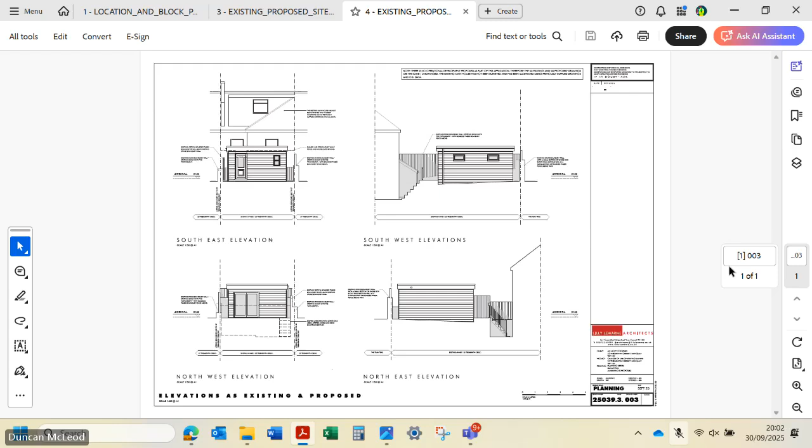There we go. It's a wooden shed - it's a glorified wooden shed in the back garden that's already there and operating as a holiday let.

Right, I think Karen was first and then Joanna. Karen? I would like to object to this, because I don't think it's change of use to holiday letting accommodation - it's not a granny annex at all, it's holiday letting accommodation. It's in a really tight residential area, and the holiday let has got access to being outdoors on a decking area, which will disturb those neighbours. So can we object on the basis that the change of use is inappropriate?

The trouble is, I think holiday letting isn't the same clause as just accommodation and things. I mean really, they're applying from an annex, aren't they, to being residential? But it's short-term lets, and people on holiday are going to be making noise. They've got a decking area to sit outside and disturb all of those neighbours.

The thing is that some people come down on holiday to Newquay and make noise, and some people don't. And there is different legislation that covers noise nuisance. I know it's not helpful, but as a material consideration in planning, being concerned about the noise probably isn't going to carry that much weight.

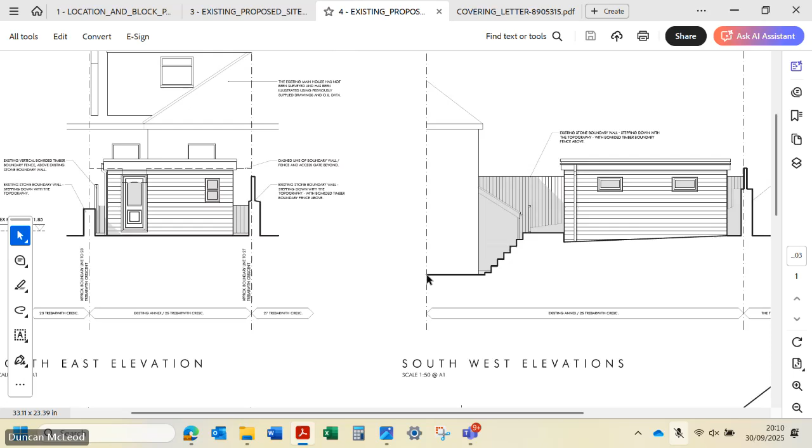Can we have a look at the satellite image, please? Yeah, sure - can we see if there's any other? Well, Sue's got a caravan in their back garden there. Let's just hope that they're letting that out. Or are we going to be able to tell? No, I don't think you're really going to be able to tell what's going on, to be honest.

The original planning permission said it should only be occupied by members of the family or non-paying guests. Reason: the local planning authority considered that the proposed annex would be inappropriate for occupation independent of the main dwelling, by virtue of the physical relationship between the annex and the main house, which would create inadequate levels of residential amenity for the occupiers of both, in accordance with policy, whatever. So I don't think it's PA.

It doesn't say - yes, I've already looked at it, and it was conditioned that it would only have supported family or non-paying guests. Had they knocked down the garden shed to do this, had it come in as a unit of holiday accommodation, we would have objected.

So I've got no problem with objecting - is that okay then, Jonathan? Yeah, I think inappropriate to... I'm just going to write 'inappropriate to a residential area' and see what they come back with, quoting the reasoning of the planning officer from the previous application. Wasn't that to do with it saying it shouldn't be a separate residential unit of accommodation due to space restrictions, so it'd be too small, because the relationship between the annex and the main house would create inadequate levels of residential amenity for the occupiers of both.

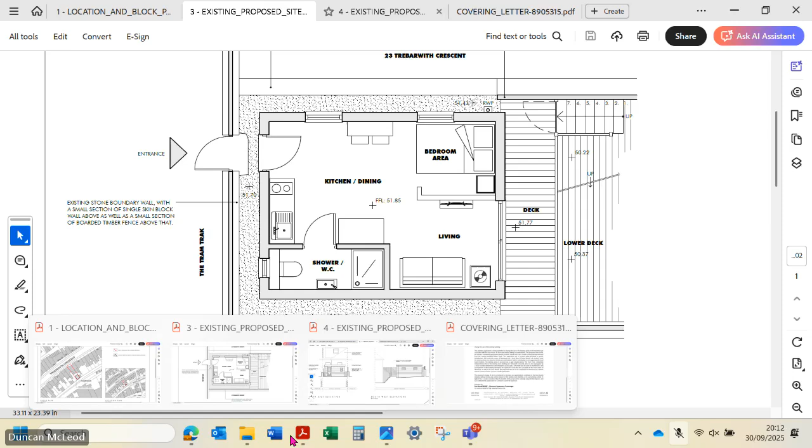You all right, Francis? Okay. And on page 8 of your pack, this bit here refers to that rather than the one we've just looked at - that bit's wrong. All right.

Back in June we objected to very similarly described proposals at this address. The application was withdrawn by the applicant in July. Key concerns included new first floor rear views leading to loss of privacy to neighbours, and the appearance being out of keeping with the neighbouring co-joined property - the other half of the semi-detached property. Basically they were squaring off this whole roof, so you'd have one half of the property with a square model and the other half with the hipped pitch, which is really quite incongruous. It's two separate households, two separate properties.

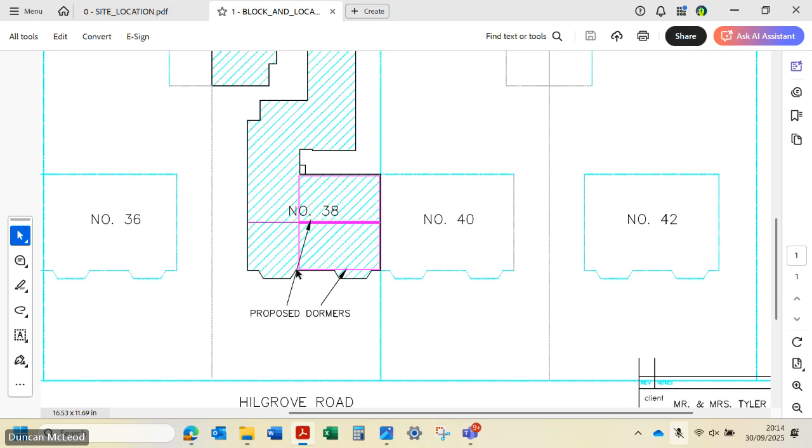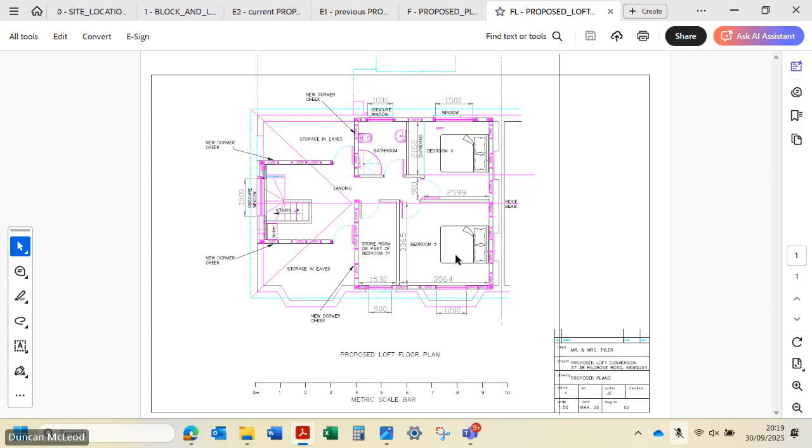I think it becomes a 5-bedroom property by the end of it. That's a lot of bedrooms for a little bungalow. Oh, really?

I think I mentioned that the terms of reference is going to be at full council tomorrow, so just pay attention to that.